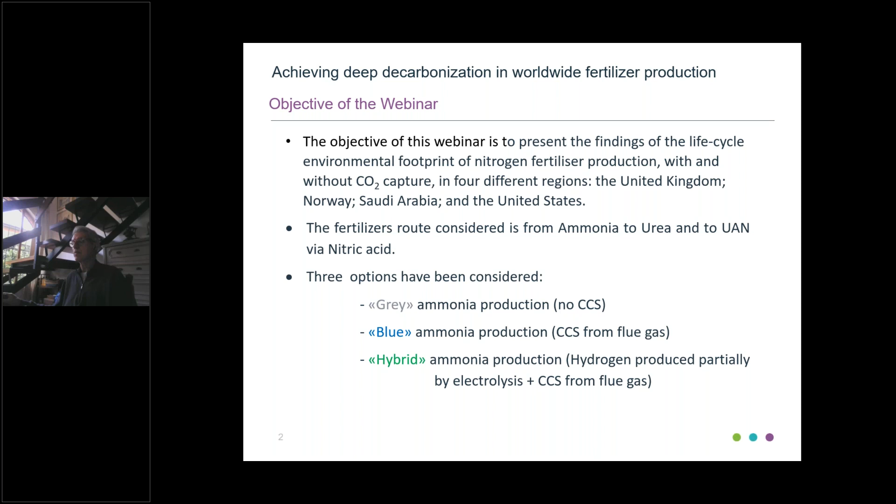Blue ammonia is again produced from natural gas, but with carbon capture from the flue gases of the steam reformer. And the hybrid ammonia production, where the hydrogen is produced partially by electrolysis, and this also includes carbon capture from flue gases. The basis of design, the main basis of design of the study, are summarized here.

The natural gas is the typical one used in IEAGHG studies, rich in methane and ethane, with very few ppm of sulfur in it, available at high pressure. On the table on the right, I present the ambient conditions and the cooling system temperature for the 4 different locations.

As you can see, the average temperature is as low as 5 degrees in Norway and goes up to an average value of 27 degrees C in the Middle East. There is a slight difference in relative humidity, and the primary cooling system reflects the air temperature, being lowest in Norway and highest in the Middle East.

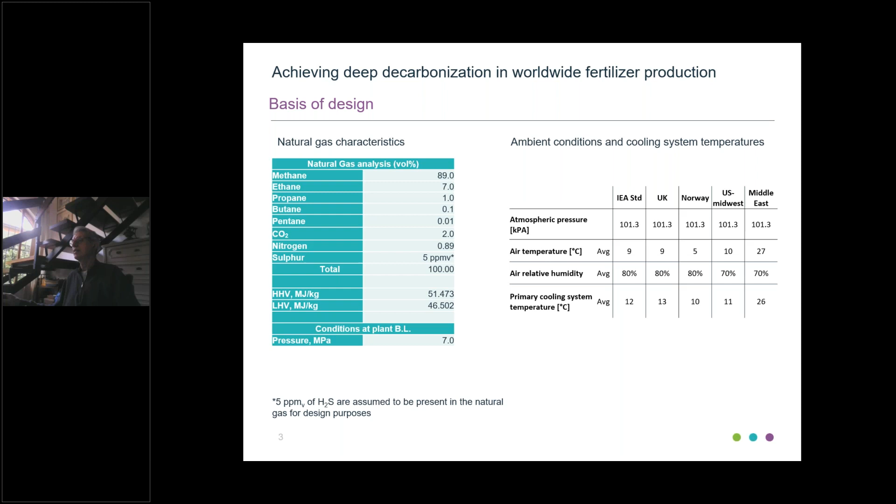The first case that we've studied is the so-called base case, which consists of 2,000 metric tons per day of ammonia from natural gas.

This ammonia production is coupled with urea production. The resulting urea production is 3,348 metric tons per day, and it is determined by the CO2 capture from syngas. That means the urea produced depends on the amount of CO2 that we have available from the syngas.

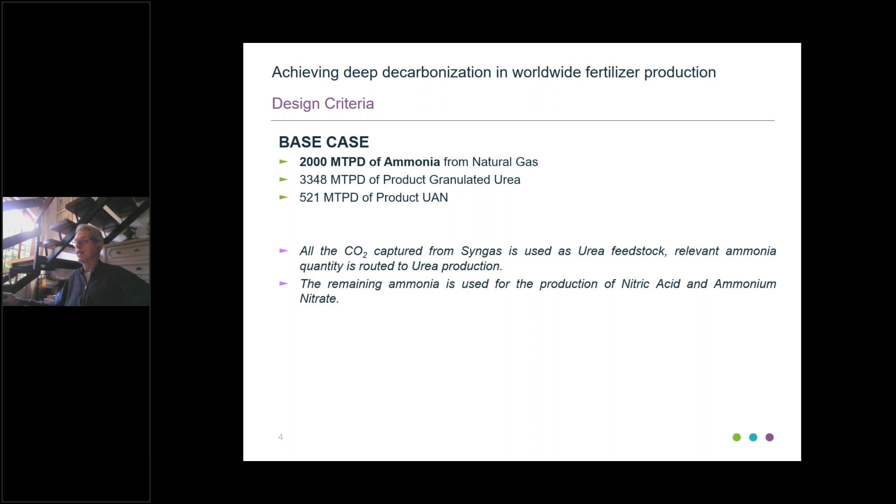With this lean natural gas, as shown before, rich in methane, there is an excess of ammonia. This excess of ammonia that cannot be converted into urea is used to produce nitric acid, ammonium nitrate, and at the end urea ammonium nitrate, resulting in a production of about 500 tons per day. In the next slide, I will show a simple block flow diagram depicting what I just explained.

This is the CO2 emitted from the flue gases of the steam reformer, while the CO2 that has been removed from the syngas is entirely used for urea production.

The result of this is that out of 2,000 metric tons per day of ammonia produced, only a bit less than 1,900 can be converted into urea. The remaining part of ammonia is used to produce nitric acid, and from there ammonium nitrate solution, which at the end is mixed with urea to produce urea ammonium nitrate.

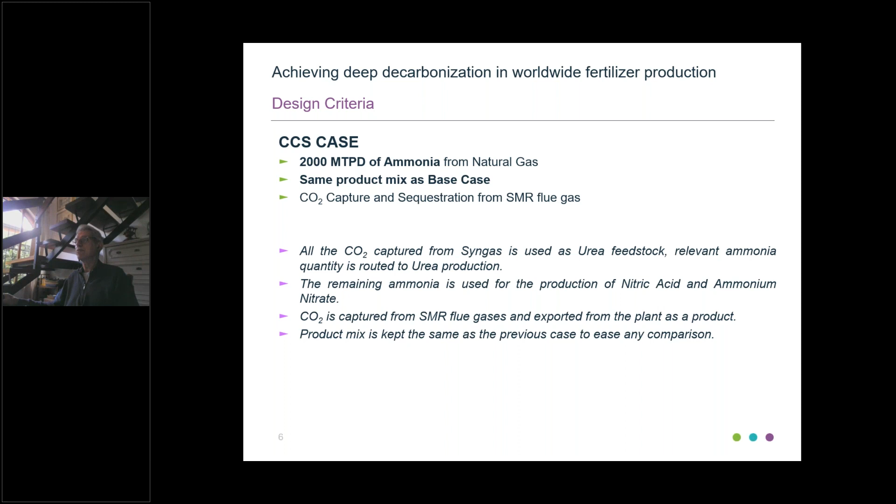we have maintained the same product mix as the base case, meaning the same amount of ammonia, urea, and UAN that we have produced. The only difference with the previous case is that we perform CO2 capture and sequestration from the flue gas of the steam reformer. We can see in this next slide how it appears.

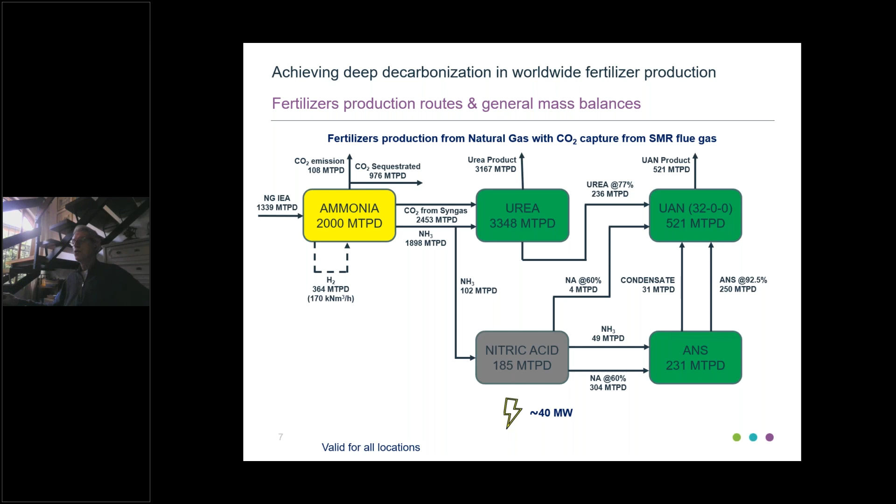The third case that we study has been called the hybrid case. Again, for ease of comparison, we have maintained the same mix of products in terms of ammonia, urea, and UAN.

The CO2 is captured, as in the previous case, from the SMR flue gases, and in this case is completely used as an additional feedstock in the urea plant, in addition to the CO2 from syngas.

What we did compared to the previous case is consider that a portion of the hydrogen is produced via electrolysis. This comes out to about 30% of the hydrogen needed for ammonia synthesis being produced by water electrolysis, while the remaining 70% of hydrogen is produced with the traditional steam reformer plant, which of course will be smaller in its front end, that is, the syngas preparation.

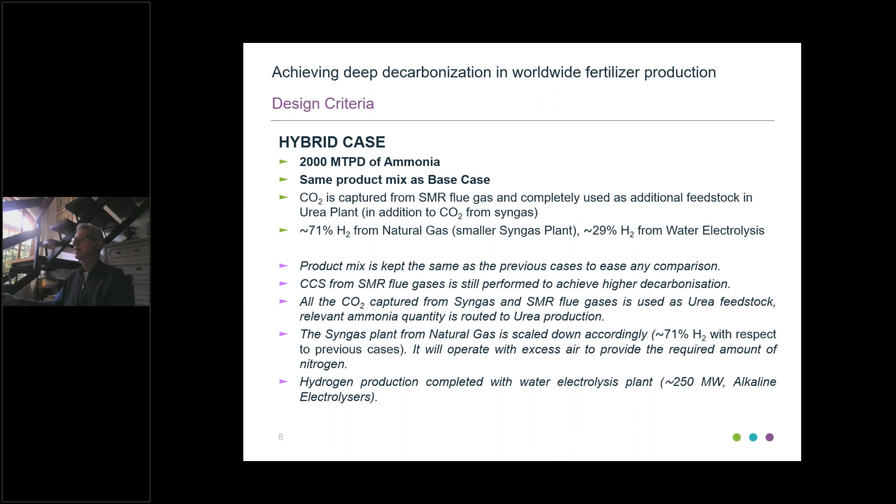So we try to maintain the same mix of products, and we can—I'll show you the block flow diagram in this case. This is the previous case, so without the hybrid, and this becomes as follows.

That means that some of the hydrogen is produced via water electrolysis. That means that a smaller amount of hydrogen is produced via steam reforming.

But in this case, not only the CO2 captured from the syngas, but also the CO2 captured from the flue gas will be used in order to obtain the same amount of urea. So it is balanced in a way that the final mix of products is similar to the previous ones.

In this case, you may see that there is a huge increase in the power demand, and this is, of course, mostly due to the introduction of the electrolysis, which accounts for about 80% of the total megawatt requirement.

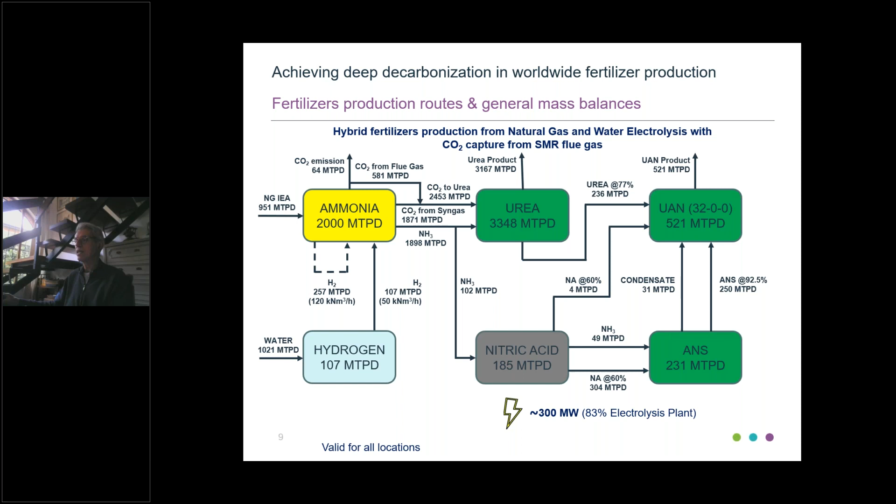When we now compare the performance of the three cases, we have some elements that are, we say, location independent—elements that do not depend on the geographical location where the plant, the complex, is built.

This is the direct CO2 emission. Of course, in the base case there is no CO2 capture from flue gases. In the CCS case and the hybrid case, there is about 90% carbon capture from flue gases. The hybrid case has a lower CO2 emission because the steam reformer plant is smaller, as we said before.

The natural gas consumption for the three cases: the base case and the CCS case show the same identical natural gas consumption. Natural gas consumption means the sum of the feed and the fuel required by the complex. In the hybrid case, the steam reformer plant is only about 70% of the base case, and therefore the natural gas consumption is lower.

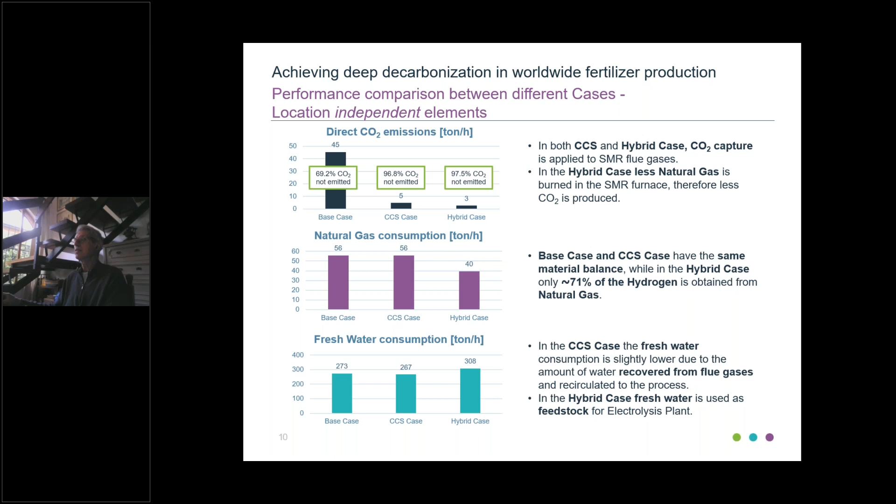In the next slide, there are performance comparisons that are dependent on location, even if they are not so dramatically dependent on location, but still they are. For example, if we talk about the electrical power consumption, you may see that...

in the base case, the CCS case shows a slightly higher power consumption than the base case because there is CO2 capture and compression. In the hybrid case, of course, as we said before, it is much higher.

The differences among the geographical locations are mostly due to the different air temperatures and sea or lake temperatures, because three out of four geographical locations are near the sea, while one is considered near a lake. So this air difference determines a slight difference in power.

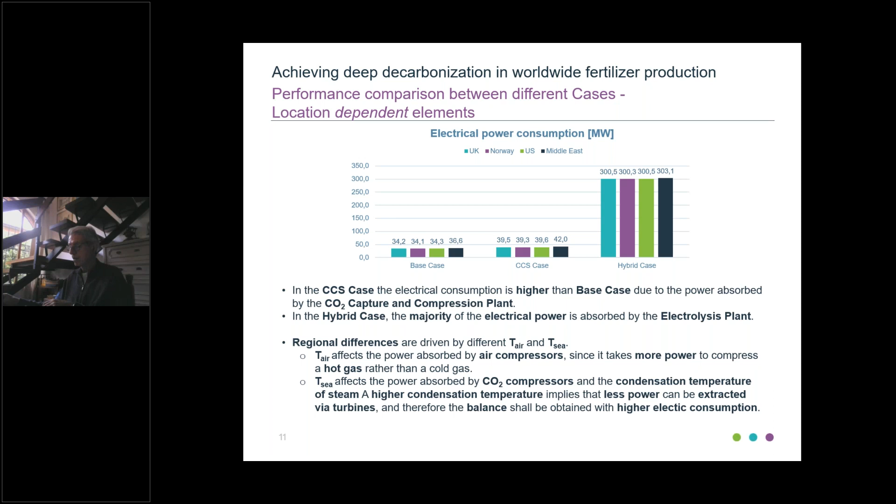Again, you may see that in the Middle East, the air temperature determines a slightly higher consumption of power.

And in the next and final slide of my initial presentation, there is the performance comparison for the sea/lake water usage, and this is again slightly dependent on the local temperature, both of air and of water. This is because the sea/lake water consumption is higher in warmer climates, since the amount of steam expanded to obtain the same power output is higher, because the steam is expanded to higher pressure.

So this determines again a slightly higher consumption of water in the Middle East compared to colder regions. Okay, this ends my part of the presentation of the study case.

I'll now hand the floor to Fabiana, who will go through the life cycle assessment.

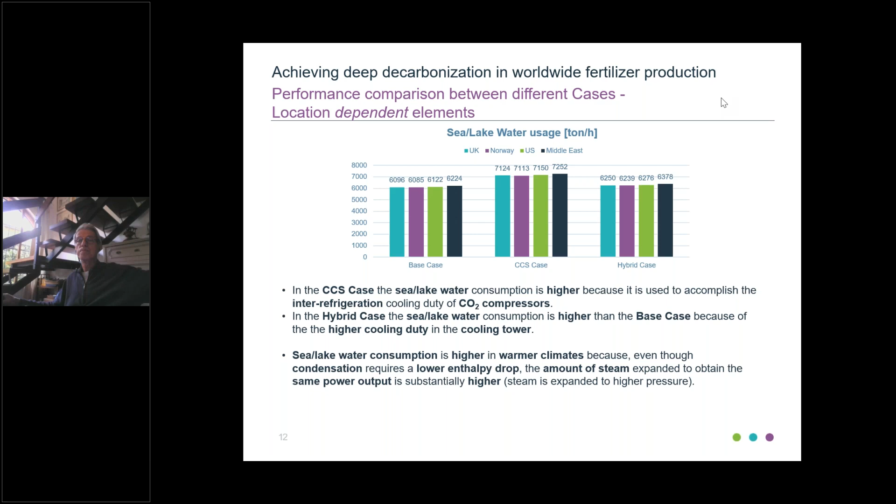So in this section, we present the results of the life cycle assessment study. Life cycle assessment, or LCA, is an ISO standardized methodology for assessing the potential environmental impact and resource use throughout a product life cycle, from raw material acquisition to waste management.

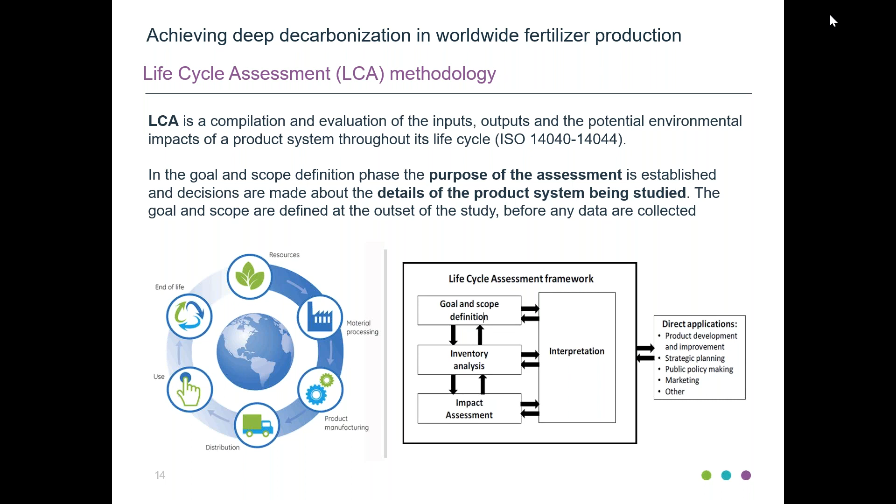So by the LCA, it's possible to convert materials, consumed energy, and emissions into understandable impact indicators, which represent the impact on different environmental compartments related to effects on human health, such as tropospheric ozone or ionizing radiation, ecosystems such as global warming or eutrophication, and resource depletion, such as water or fossil depletion.

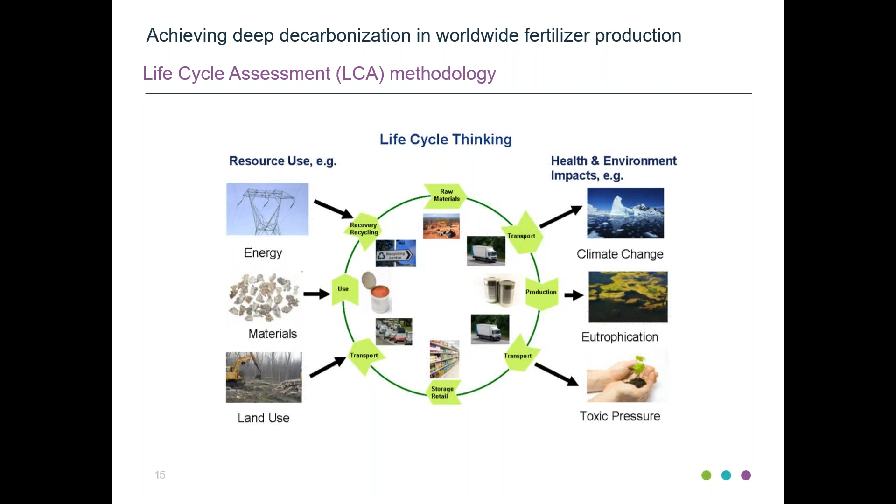Next slide please. So the goal of this study was to evaluate the environmental impact of urea and urea ammonium nitrate solution fertilizers, comparing 3 different technologies explained before, and demonstrating how deep decarbonization of these 2 fertilizers can be achieved. 4 different regions representative of certain regional conditions were considered: Europe, in particular United Kingdom and Norway, United States, and Saudi Arabia. So the focus of the study was the ammonia synthesis process, precursor of urea and UAN fertilizer.

As mentioned before, case 1 represents the conventional ammonia production and is used as a benchmark case. In this first case, natural gas is used as feedstock for ammonia production, and CO2 emissions are released into the atmosphere. In the second case, we have investigated ammonia production with CO2 emissions capture, and in the third case, a hybrid production of ammonia from water electrolysis and natural gas with CO2 capture from flue gases was investigated.

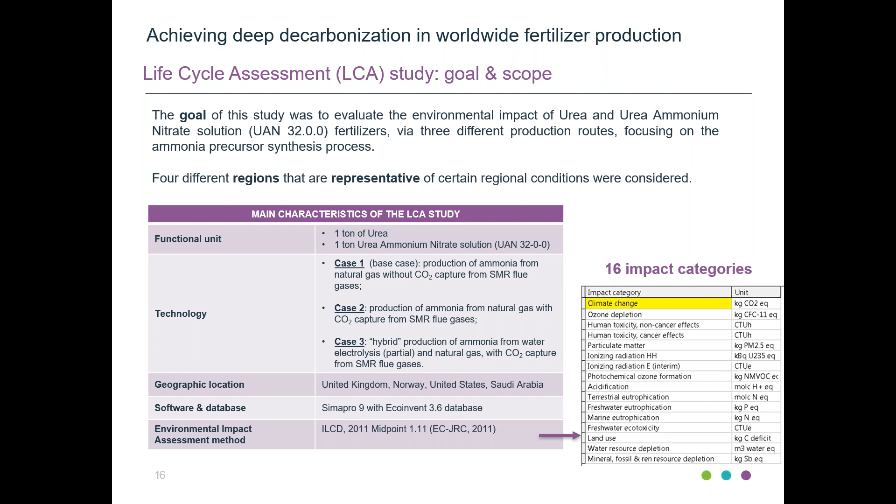The picture shows the system boundaries of the analyzed system. System boundaries are cradle to gate, so from resource extraction, such as natural gas, until the production of both fertilizers. We have not considered the use phase and the disposal phase of fertilizers, since they are out of the scope of this study.

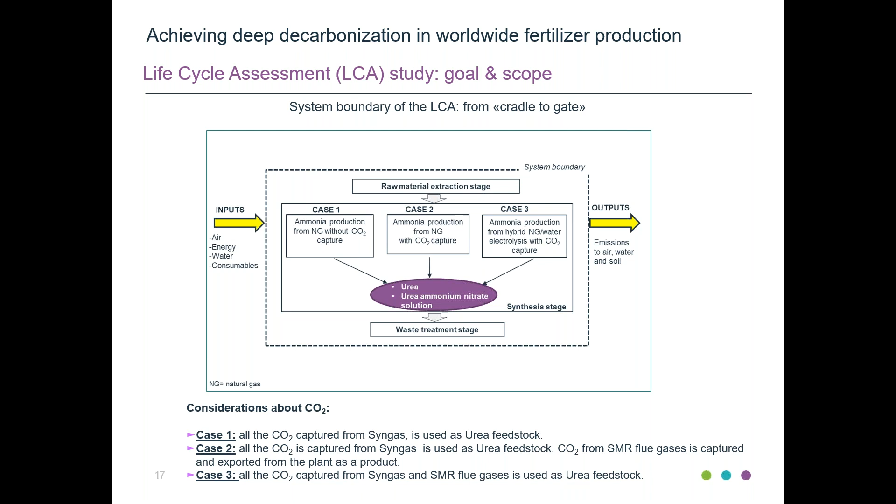Okay, next slide. So here we summarize the main assumptions of the LCA study. The process schemes selected for this study are generic for the location analyzed. The only exception is the presence of a seawater desalinization plant for the Middle East case.

Natural gas is country specific, but doesn't match the fixed composition defined by IEA standards. CO2 consumption during the production of urea and UAN was not considered. In fact, CO2 is produced as a byproduct during ammonia production and is consequently used as input for the synthesis of urea. This CO2 is released after application in the field, so it needs to be considered in the inventory for agricultural production.

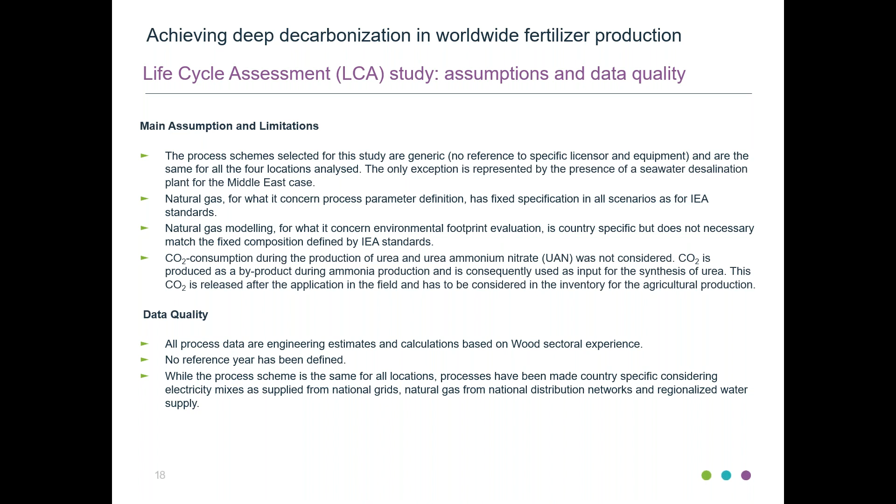So about the data quality, all process data are based on engineer estimates. No reference year has been defined, and some processes have been made country specific, considering electricity mixes as supplied from the national grid, natural gas from the national distribution network, and water supply.

So in general, the environmental impact of the fertilizer production investigated is mainly affected by electricity consumption. So in the following slide, a direct comparison among the 4 investigated locations where fertilizer are produced is presented. The goal was to see how the use of an electricity grid mix with different shares of renewables and non-renewables for fertilizer production affects the results.

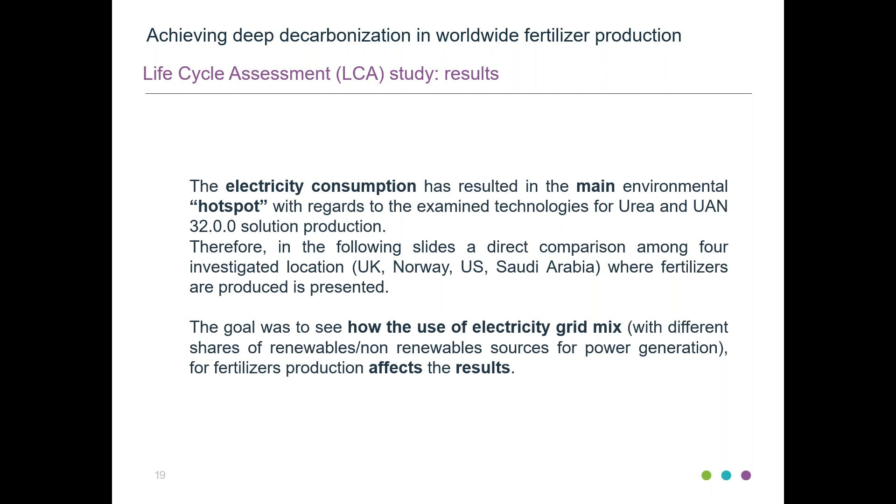As you can see, the charts show the results of the comparison of environmental profiles of the 3 different cases in each impact category, for European and extra-European regions. The worst case scenario, the one with the 100% value, is chosen as a reference. The other scenarios are reported with the consequent percentage.

So overall, the results show that for all investigated regions, case 2 in orange, the one with the integration of CO2 capture technology, reduces the greenhouse gas emissions by more than 30% when compared to conventional ammonia production, case 1 in blue. These results depend on the decrease of direct CO2 emissions from the ammonia process, thanks to the CO2 capture unit.

Specifically for the climate change category, we can see the highest environmental benefits in the Norway case, where a reduction of the impact up to 70% is achieved. In UK, the impact decreased by 53%.

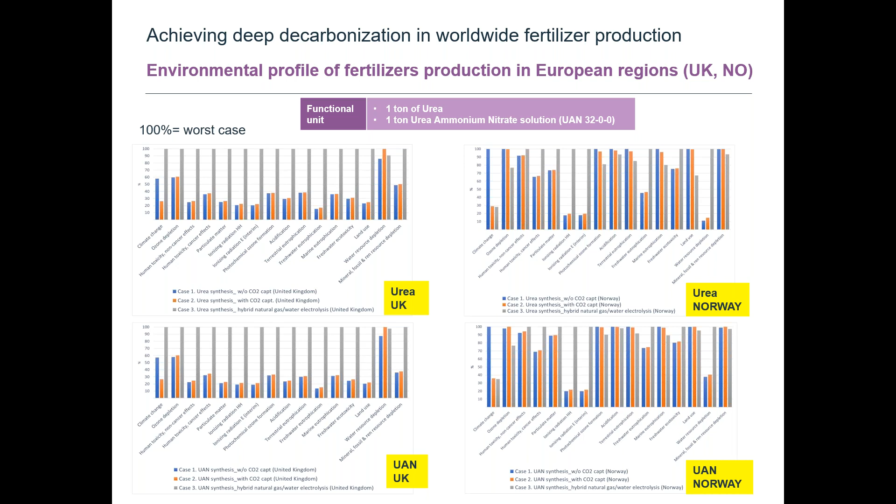Can you move to the next slide? Okay, in US the impact decreased by 40%, and in Saudi Arabia by 33%.

The rest of the environmental impact categories show a different trend. As you can see in the figure, case 2, the one with CO2 capture, performs slightly worse compared with the base case, especially in the water depletion category.

This result is due to the additional plant consumption to capture and sequestrate CO2. Case 3, in gray, the one with ammonia produced from natural gas and water electrolysis, shows the highest overall environmental impact compared to case 1 and case 2, due to the highest electricity consumption for the electrolysis process. The only exception is the Norway case, where case 3 has the lowest impact on 7 out of 16 categories.

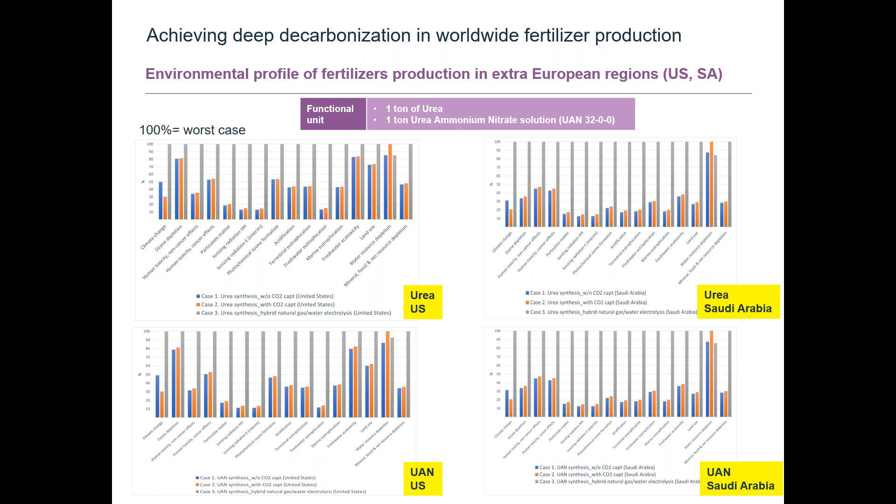So in order to better understand the relative magnitude for each indicator and focus only on the more relevant categories for the study, the LCA results have been normalized and weighted, dividing the characterized values by a reference value. In this study, the impact categories that cumulatively contributed to at least 80% of the total impact were climate change, photochemical ozone formation, acidification, water depletion, and mineral and fossil depletion.

Since greenhouse gas emissions, and in particular CO2, play an important role, here we present a special focus only on the climate change indicator, expressed as kilograms.

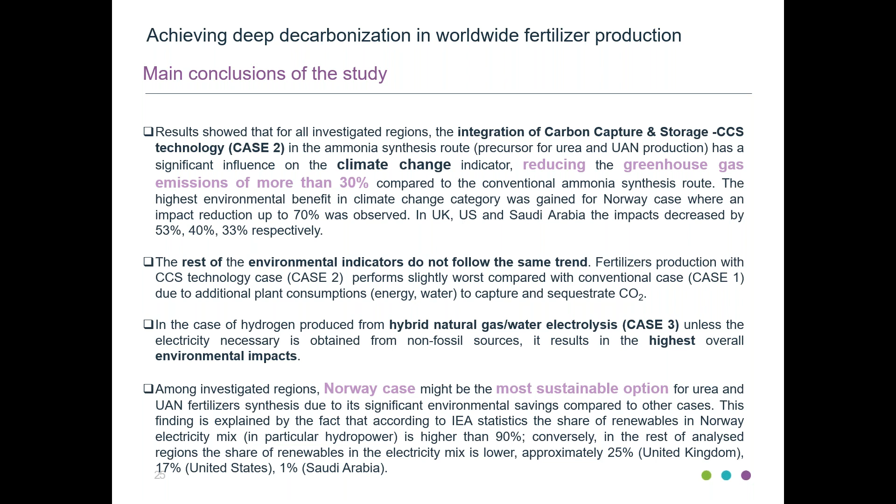And just to conclude, I think the study suggests that by transitioning to renewable electricity sources for power generation and implementing a more sustainable production alternative instead of conventional SMR, the overall environmental burden can be substantially reduced.

There is, of course, room for other studies, or to utilize the captured carbon for other purposes like EOR, polymers, methanol, therefore reducing the overall greenhouse gas emissions. And of course, every alternative for CO2 utilization can be evaluated from a life cycle perspective.